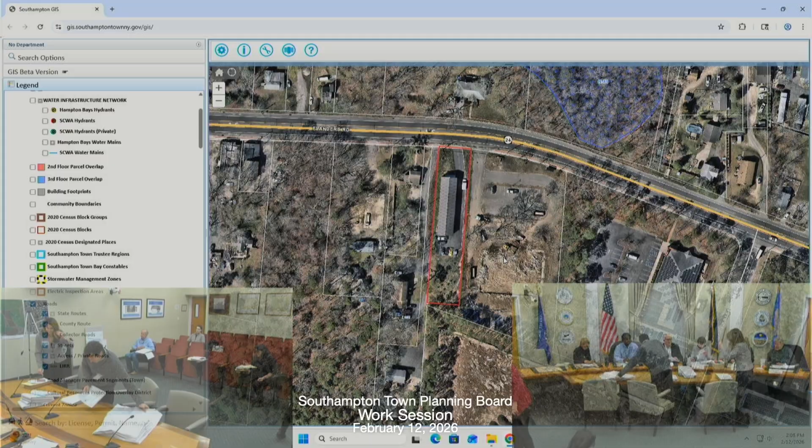Welcome, could you just identify yourself for the audio record? Haley Lyons from Farrell Building Companies. Welcome. So yeah, this is at 265 Flanders Road, in the light industrial LI 40 district.

Furthermore, it is also listed in the Aquifer Protection Overlay District, the Central Pine Barrens Compatible Growth Area, and the Riverside Overlay District.

Seth, can you just orient us exactly where it is in Flanders, what's close by? Sure, well so if you're aware of the STP, the sewage treatment plant, and the enterprise zone, that's to the south.

I can do this. Thanks. So this was the Head Start building. It's been demolished, and then, of course, that's the bank on the corner, but the STP is south of that, down south of it. Okay, perfect, thank you.

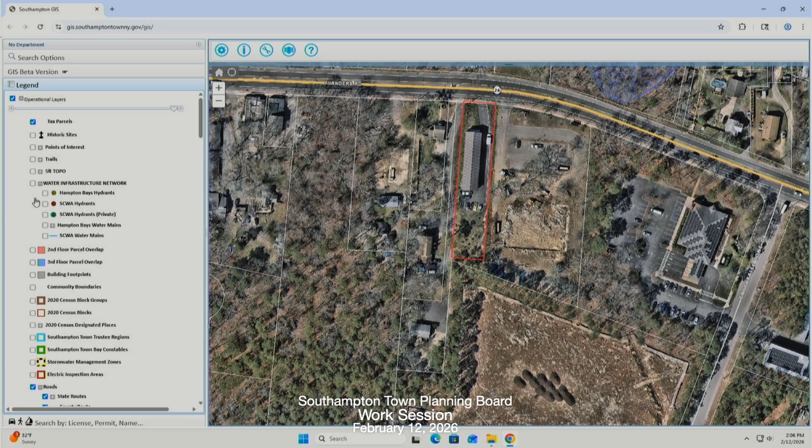Head Start next door, residential to the west, town, and otherwise it's town-owned land. And then to the north you have county - I think one of those is county and one is a residence.

At any rate, this is a fairly straightforward application. The site does have a site plan for True Arts Ironworks, correct. This will be a change of use from a special trade contractor to an auto body repair garage, and there are minimal modifications in this application to the pre-existing building.

Okay, you good on the parking there and everything? That is one of the reasons this is before us. In fact, the crux of the matter was - it had 3 overhead bay doors, 12 by 12 garage doors. According to the code, for every bay door you have to have 4 parking spots.

So when it came back in, we noticed there's not required parking for that amount of overhead doors. What the applicant is proposing is to remove the overhead garage doors, keep the 5 existing parking spots with 1 overhead bay - that would be the 4 for the bay and the 1 for the employee.

Now, do they get credit for interior parking though, don't they, if they're showing that? That's a great question, I don't have... The bays are what's generating the parking. So if you have a bay, it generates 4 more parking spaces because of the use.

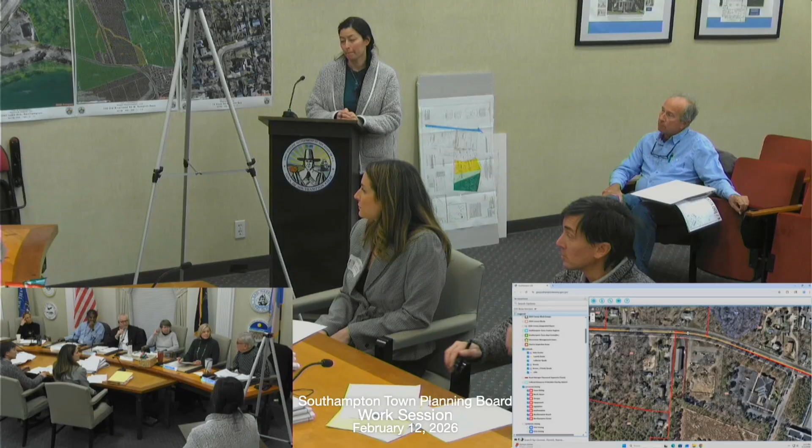One of the challenges we'll face in the future, not now, maybe 2028 or 2029, if the plant comes online in 2030, is what about new projects switching to IA systems just a year before connecting to the sewage plant? It's a problem for the future, not for now, but interesting.

We've had discussions about this. Kathleen Murray, another town attorney, and Janice and I had a discussion about it yesterday. Janice had met with the Health Department, John Schellingen, and my understanding was specifically with respect to residential - I don't know about commercial yet - under the town code presently, if you do an expansion of 25% or more, you're required to hook up to an IA septic system. Under the health department, if you meet certain criteria, you're supposed to upgrade to a septic system. There is a provision in the health department code that says if you are in an approved sewer district that is on the commissioner's list, you're not required to install an IA because you're getting a sewage treatment plant.

Because it's unfair to make somebody put in a brand-new system for $30,000 and then just have to yank it all out. So in that particular instance, for residential homes, if they wanted to do renovations that would in theory trigger an IA septic system upgrade, they would say okay, you're getting a sewer district in 2 years, you don't have to put one in, but you have to know you're going to be connected. Right, good to know. So don't put in an IA system. No, we'll try not to.

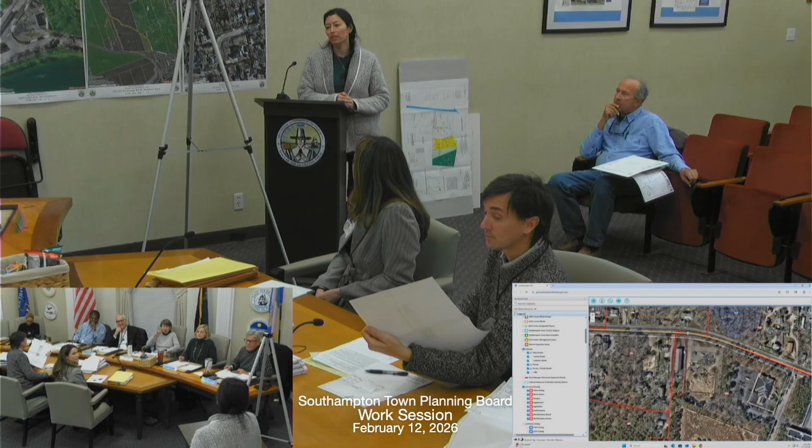Wouldn't we want that modified to allow for trenching into the sewer? I'm thinking of large trees. It depends on where the existing septic system is - we don't know that yet. Because this lot has an existing septic system, and depending on where it comes out, you may not want to re-plumb the entirety of the building. If it comes out on the side, they would just connect that side to the grinder pump and run it underneath.

The disturbance for this is really going to be minimal because it's just the trench for the pipe, which is probably only going to be this wide. And the grinder pump - they brought one in for one of the recent work sessions - it's in the driveway, you drive it up, so I think you're all fine.

They have technology now where they can do directional drilling of pipes - directional boring. I mean, obviously the size of the grinder pump is dependent on the use, but they're really not big, like this big.

All right, do you have any more questions for me? Do we know - Teresa, thank you as always. Yeah, thank you, really got an education. What's happening to the Head Start site?

It's not our jurisdiction, so we really don't know. I could ask. The reason I asked is I was wondering - this isn't County Road 39, but it is a busy road - do we need to provide for any kind of cross-access easement between the two properties? I guess we could, but it's just not apples and oranges, right?

I'm just asking because I don't know, especially since this is going to be a pretty low-key use. It would be ideal, but it's also a place that, if it continues to be Head Start, has buses coming in and out. It's really a low-intensity use on our site in particular, the one in question. I can't speak to what comes next for that Head Start.

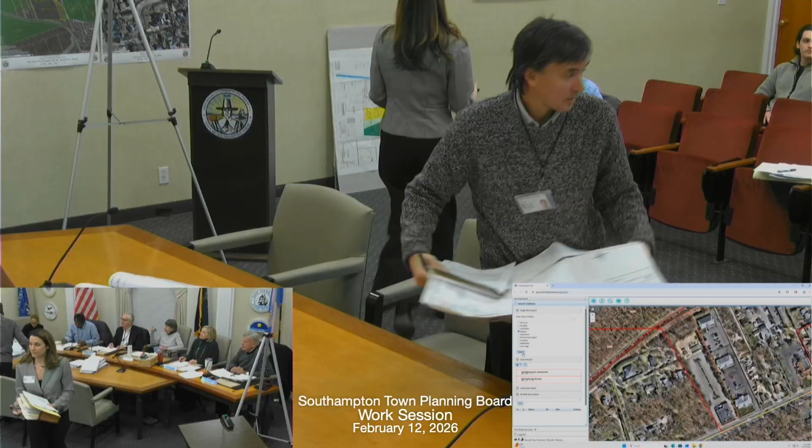Anthony, tell us the status on Pietro. I think Kevin was just going to advise the board where he is. Hi Kevin, how are you? Come on up, just identify for the voice record. Kevin Springer, Dynamic Legal, 48 Columbine Avenue North, Hampton Bays, New York.

We've had a couple extensions here, as we're all aware, but I have finally gotten a hold of the lone complainant, who is the neighbor to the west, and I gave them a quick update. We are going to meet next week to walk the property again, show them what's been proposed, see what they think, and try to come up with an amicable solution for everybody so we don't have to keep dragging this thing out.

This way we can have it all on paper and there's no more confusion and call it a day with it. So we'll get a revised site plan once you know. I'll eventually need the revised plan because I have to move the outside bar anyway, that's just by code.

So it's definitely gonna happen. We're thinking of an extension, Anthony, do you know what is it, 30 day or? No, we'll just do to the 26th. I'm gonna meet them in 2 weeks, literally 26th, probably Monday or Tuesday of this coming week. So, is the idea, do we have a motion to extend to the 26th? Motion by Kate, second by David, all in favor? Aye. Opposed, abstentions, 5 yes, 1 absent, 1 vacant.

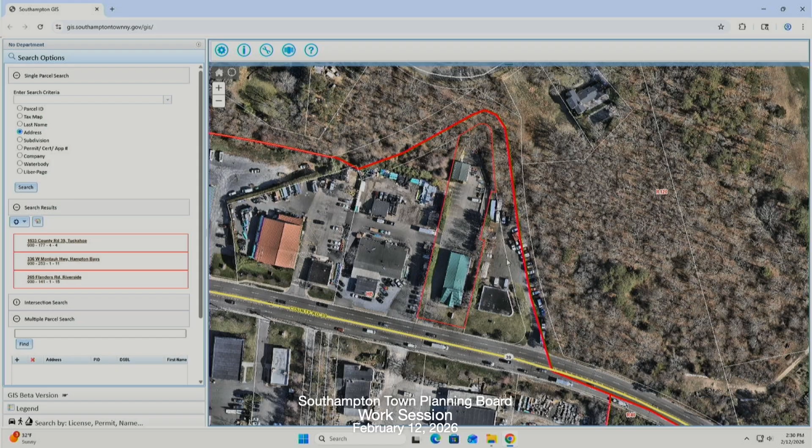And so, what is Brown Buddha? So there's been a complete site plan done on this property since this bond was effected, and it was never released. So this would be releasing the money back to the person who did a bond on this property back in 2012, way back in the day. I'll write a resolution to the fact that we had a bond set, the applicant never requested the bond to be released, but there's been a complete site plan that's been completed with the CO, and therefore the monies is not relevant anymore, it can go back to the applicant.

I was just gonna ask if the applicants don't chase the money back once they finish. You know, it's funny, but that would be probably one of those things with New York State, you look that up, if there's money someplace for you. It should be distributed among the underpaid planning board. It's $2, after the mic's off I'll tell you what I think.

Do we have a motion by Gloria and second by Kate, all in favor? Aye, opposed, abstentions, 5 yes, 1 absent, 1 vacancy. How about B and B Properties, this number is the 5?

Same situation. This is Starbucks. It was approved back in 2000, Bridgehampton. And this was 2 bonds that you had set, one for $1,000 that was to upgrade the lighting, and the other one was $2,000 to upgrade the landscaping plan. And again, there was a site plan done in 2010.

For some office building on the property, and we completed that, CO issued, no bond with that. So this would be just to return the monies.

Is it one resolution to release the two bonds? Two bonds, very good. Motion? Kate, but on the motion, Gloria on the second. All in favor? Aye, opposed, abstentions, five yes, one absent, one vacancy.

Dakota, is that you? Dakota Properties, yeah. Yes. And then this is off the agenda, I have to check item double 6, is that one? Great, alright Claire, don't go too far.

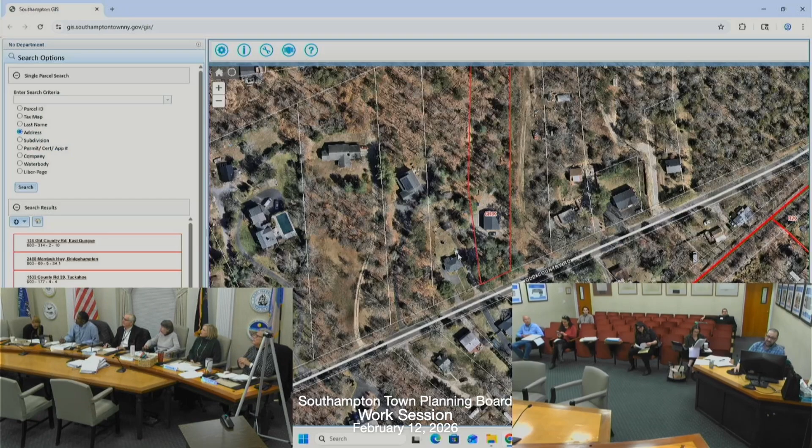If you look at the aerial up here, it involves two properties on Old Country Road in East Quogue. It's a CR80 zoning district, these two existing properties. It's got an existing house with a garage, and the application was processed as a subdivision, but it's sort of a reconfiguration of the lots, so there would be one lot in the front and one lot in the back. It's like a flag type situation.

Well, actually, if you look at the aerial, it's hard to see up there, but to the north on this property, the very north end, a portion of the corner of the property fronts on William Street or something—it's a private road. They don't have rights of access to it.

But this was a project that went before the zoning board for some lot area. At the time, it was a determination that was made that they had legal frontage on a road, so they didn't need a variance, but they're actually providing an access easement from Old Country Road to provide access to the back lot.

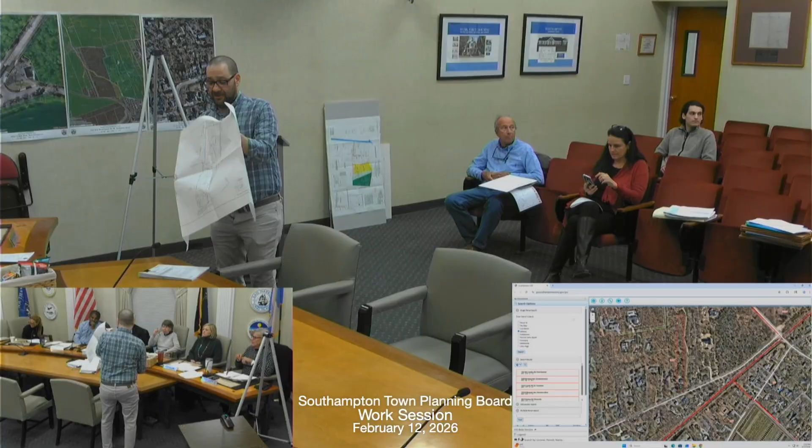Sort of see, it's pretty straightforward. The front lot there has all of the existing improvements, and then the lot in the back is vacant. Where's the access for the back lot? It's hard to see in the plan. Where is it taking access from the back lot? Right here, to the side.

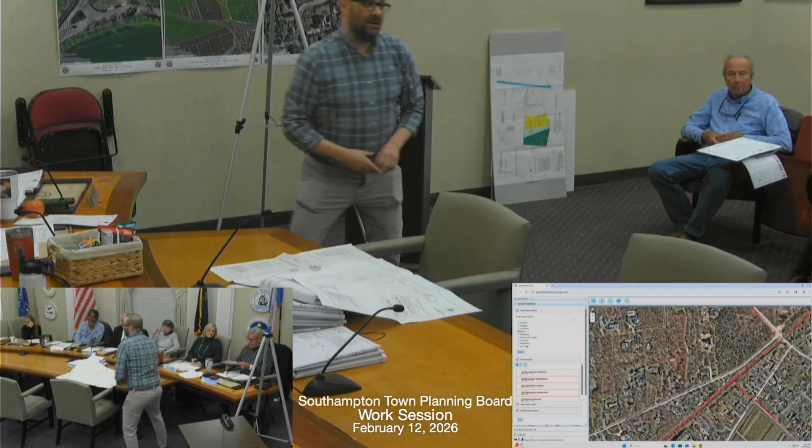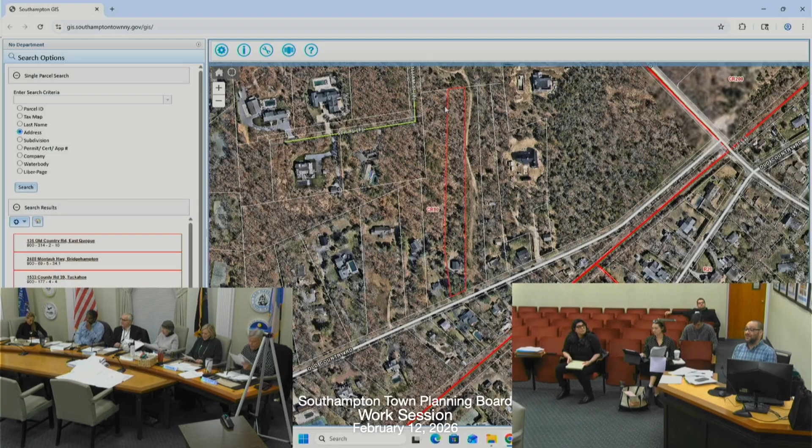Now I'm just gonna give out a little pile of papers for everybody. When this was done, this had a planning board application, a ZBA application, because it needed a little bit of relief. This is in the Aquifer Protection Overlay District, and what happened was it got classified as a type 2 action, and it got processed that way.

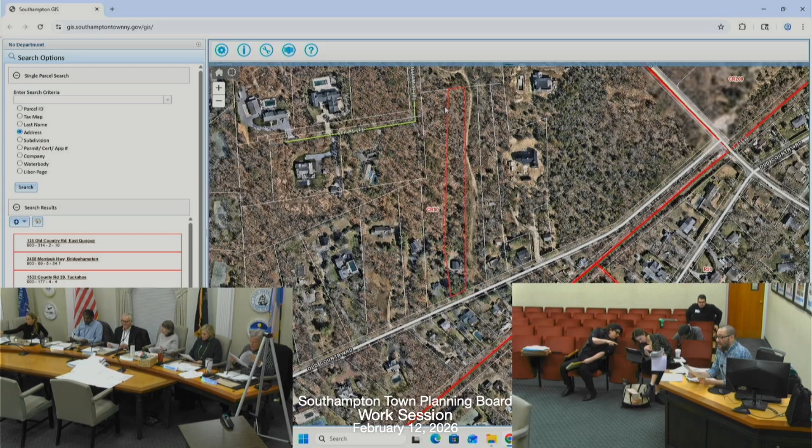A colleague of mine from another municipality who lives nearby pointed this out, and he's correct—it should have been classified as an unlisted action. So what you're going to see in the very first two papers I gave you is just a short EAF form, and then a resolution rectifying the record here. It's a two-lot subdivision with clearing restrictions. It's only one new house, so there weren't any significant impacts, and that's why we did a short form.

But if you look at the resolution, at the very bottom of the first resolution, it says: be it resolved, the Southampton Town Planning Board hereby rescinds the previous type 2 classification and reclassifies the action as unlisted to ensure an accurate record and proper procedural compliance with 6 NYCRR Part 617. Then it goes on to further resolve that the planning board conducts an uncoordinated review of the unlisted action and establishes itself as lead agency, and has reviewed the short EAF form and recommends a negative declaration.

I wanted to get it in the record so that it's clear that we acknowledge that there should have been some SEQRA review here. So my first action really was to reclassify, be lead agency, and issue a negative declaration. So that's the first resolution.

Do we have a motion? Motion by Gloria, second by Kate. All in favor? Aye, opposed, abstentions, five yes, one absent, one vacancy.

And then if you go to the second resolution, it's actually a conditional approval. So I'll go through it there. Sure.

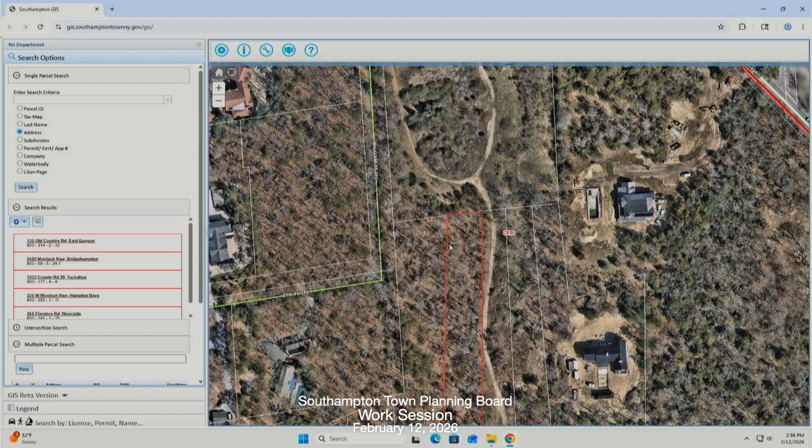What I'm recommending, because we have clearing restrictions that we're going to impose per APOD, is from the north side of the improvements on this property, a 20-foot buffer all the way up to the top. There's been some pine beetle damage here, and there's some nice white pines already in this area. They're not usually used in native plantings, but they do exist and do a little better. After talking to Teresa about the pine beetle situation, and the neighbor confirmed they were out there, I'm recommending they augment that buffer with some white pines to maintain a buffer corridor and protect neighbors.

And then we're going to have the clearing restrictions on top of that.

Number 3, the zoning board granted relief for this on November 1st, not 2028 — that hasn't happened yet. Time flies.

Health Department approved this in August 2025. Number 5, we had a public hearing on December 11th followed by a 30-day written comment period, and we did get comments. We received a letter from the adjacent property owner, Brian Frank, dated January 9th, raising a number of issues and objecting to the subdivision: clearing calculation discrepancies and inaccuracies, existing non-conformities to current zoning, and the subdivision would only create additional non-conformities, diminished ecological benefits, the pine beetle infestation, incorrect septic classification, and storage and maintenance of trucks on site. There had been some indication from two neighbors that trucks were being stored on site, but on the two occasions I went out there, they weren't there, so I noted that in my resolution.

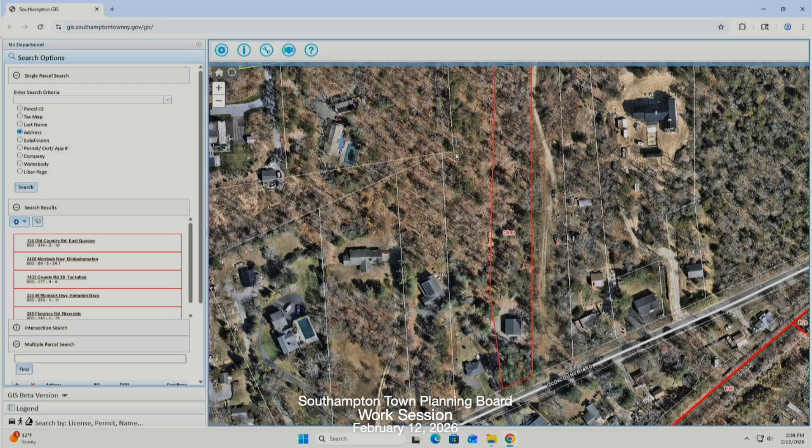On both lots, right? If it's on the western property boundary, or just — yeah, well, where we had the issue, you can see here... I was recommending augmenting it here, because this is where you get a lot of the beetle infestation. As you come up here, it gets better.

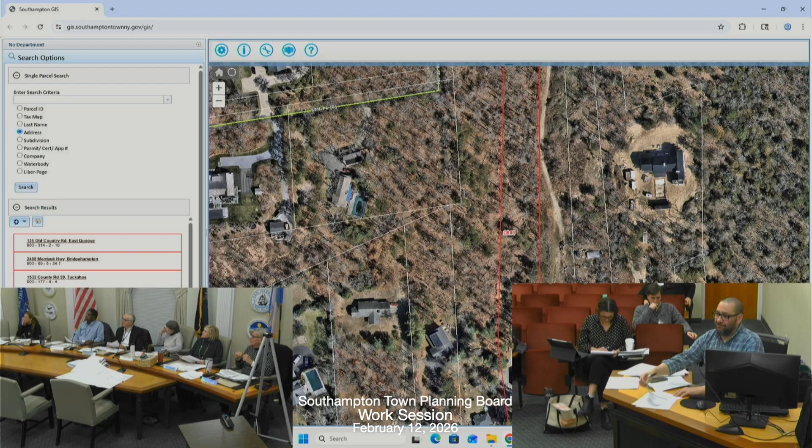Can we tie it so that it wouldn't be on the vacant lot? It wouldn't be on the vacant lot, so I can't tie it to a CO, and you can't tie it to a building permit. So I didn't know, we just wanted to give a date — you don't want to take a bond on private property.

Can we tie it to signature of the map? Or are they looking to get it signed pretty fast? It's February — they probably could get it signed pretty fast. Their representative said, come on up.

Anthony, while the applicant's coming up — I'm seeing the red lines around what I think is the property, but you're pointing to... It involves two properties next to each other, so it's this one and this one, and on that map, combined, one lot will be down here and the other lot back here. Could you identify yourself? Brian Locascio with the Adam Miller Group, attorney for the applicant.

Perhaps I could put together a simple plan showing where these trees are to be sprinkled in, and we can tie that into the declaration we file, requiring the applicants to maintain the buffer materially consistent with this plan, dated and prepared by us. That way there's a plan on file, and if it's cleared, we can just re-implement that plan. I'm okay with that. Yeah, that works.

Just get together, we'll write that into the resolution. I'll put into the plan where we feel like these trees are needed. You should prepare a plan, then we can approve the plan, and Anthony can take a look at it. All right, great.

Number 9 is an updated clearing line and clearing calculations. Take into account they'll show the pine beetle areas of infestation. We don't typically penalize somebody for that because it's not their fault, but at least we could see where it is in relation to the building envelopes and the buffers, and if it needs to be supplemented, we could do that. But it's best for Marty's office to just leave it alone and let it revegetate. That's so true - anytime we pull a permit, we're going to have to comply with clearing, so we need to look at it every time.

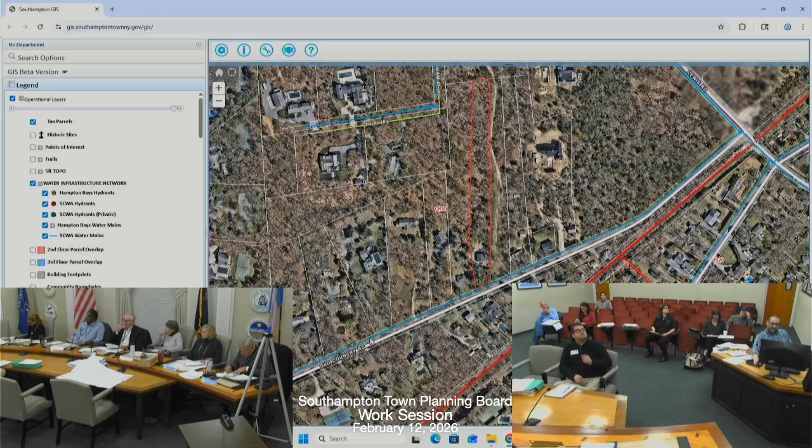The next one is from the Town Office of Fire Prevention. Weirdly, they're recommending fire hydrants somewhere up here. The thing is, we have public water in the street, and a hydrant over here and a hydrant over here, and we didn't get a recommendation from the fire district on a hydrant. So I'm inclined to just leave it out.

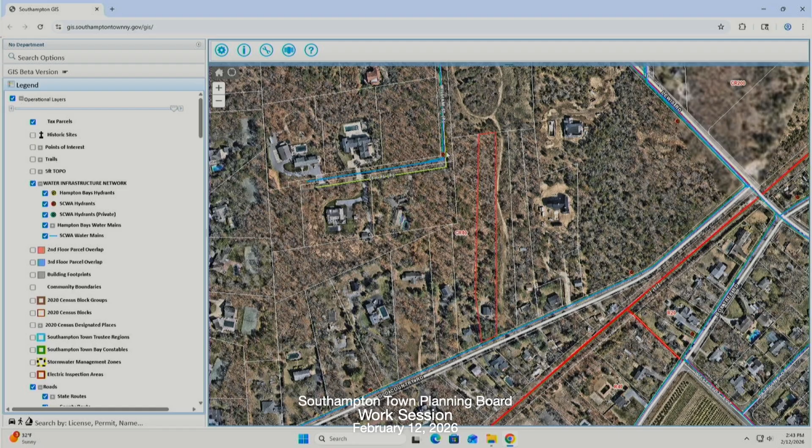Have they responded? Is there water on William Street as well? I see a blue line up there. Yes. Is there a hydrant up there? There's a hydrant right here too, I just never noticed that. Where, on William? Yeah, right here. So there you go. So, the reason is you have public access water, no recommendation from the fire district itself, so I'm just thinking we don't need it. Yeah, it usually comes from the fire district. That be more of a reason to remove the buffer from in front of the lanes altogether, or no?

It could account for emergency access, but I don't want to overcomplicate it. If a brush truck knocks over trees, there's bigger issues at that point. Let's just leave it with the ability to put a driveway in there. That's typical, boilerplate language.

Trails - no advisory, no recommendations. East Quogue Fire District - no recommendations. The Pine Barrens did come back with their review.

Pretty standard, if you go to the bottom of the page and the next page where they get into the requirements, they talked about natural protection of vegetation through a covenant. We will put a covenant in there that will reference the APOD like we normally do. I don't think that's an issue.

They said placing an identifying marker on the edge of the area to remain natural. We do project limiting fences during construction, so I think that's covered, to be quite honest. I drafted a sample covenant a year or two ago that everyone seemed to like about project limiting fence and keeping it up for the duration.

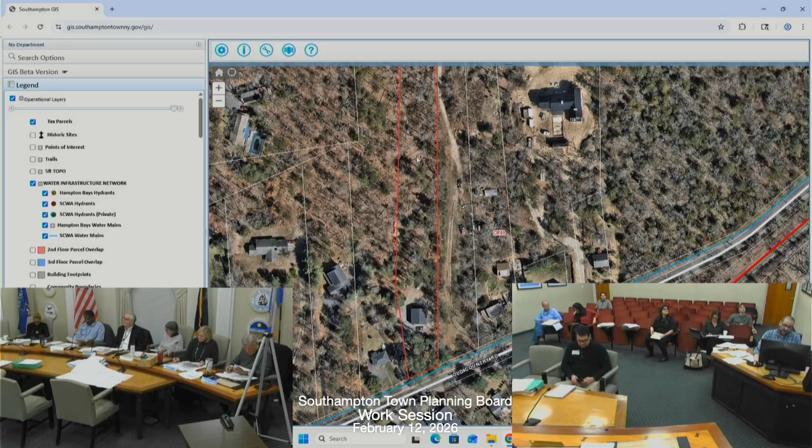And it's shown in the map over here going to the back. And again, we won't close the door for access here.

They have the rights. They could take it.

The Aquifer Protection Overlay District clearing limitations for each lot - no new utility poles for overhead utilities, all new utilities shall be installed underground. There's the 3-inch drainage requirement for the engineer, and retention of all stormwater on site before, during, and after construction. Mortgage consent if applicable, title certification, town attorney approval of all legal documents, and submission of the Mylars and paper prints to be signed and filed within 62 days of the signature.

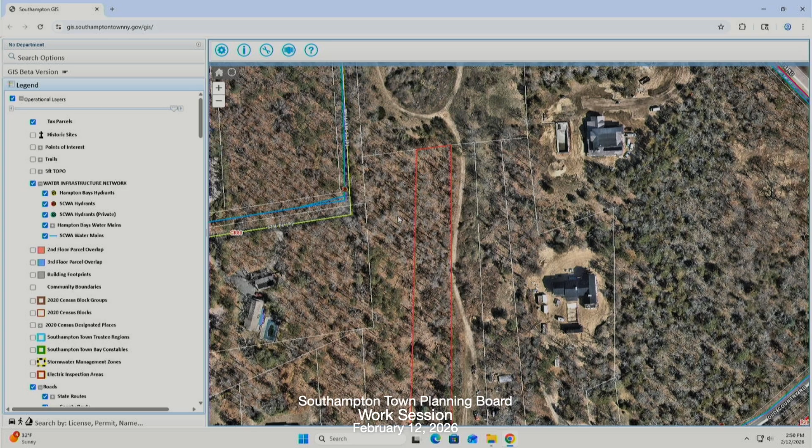Very good. Any issues, Brian? Okay, do we have a motion? Motion by Gloria, second by Kate. All in favor, aye. Opposed, abstentions? 5 yes, 1 absent, 1 vacancy. Thank you very much, good job. Thanks, Anthony.

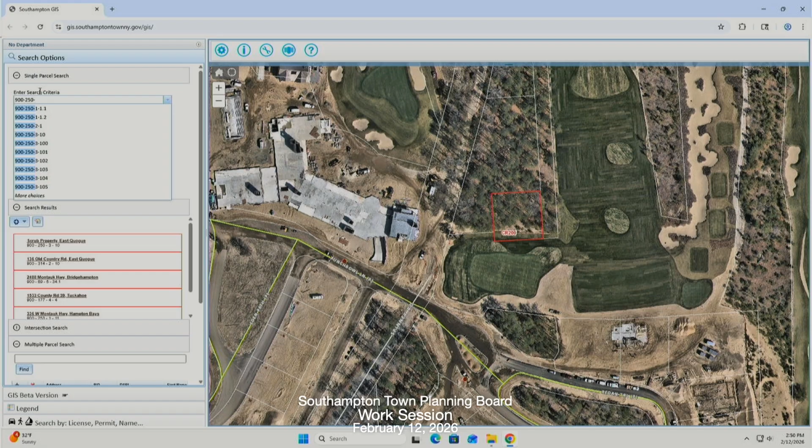Come on up, come on up, Joe. I wasn't here the last time this was on; the last time I saw it was back in November, 4 lots, and in December now we're down to 3. George, you weren't here either, right? Both of you weren't here at the last meeting? No. Yeah, okay. I wasn't here at the last one. We'll have to reacquaint us, Joe.

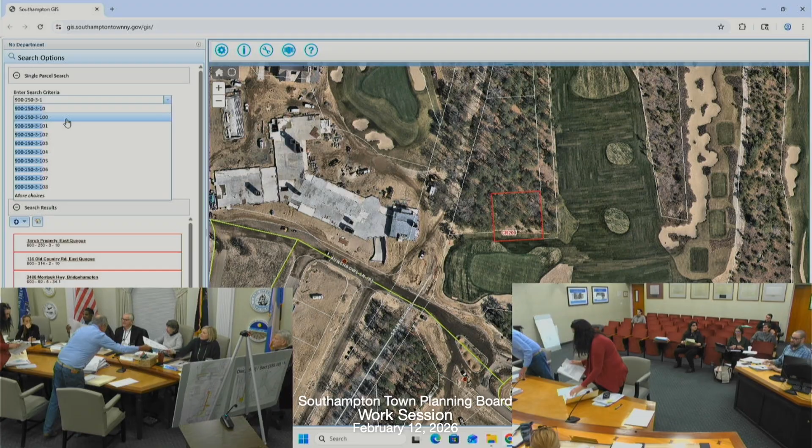For the record, it's Joe Gaza, and I'm before you today because I have an application. I've been before you for about 5 years on this. And, can I cut ahead, Claire? No, you can go. So we left this with an extension of the deadline until the next meeting, February 26th. But Joe called me up and said, can I be on the agenda? And so I said yes. So he's got something additional to bring to the new meeting - information I'd like to bring to the attention of the board.

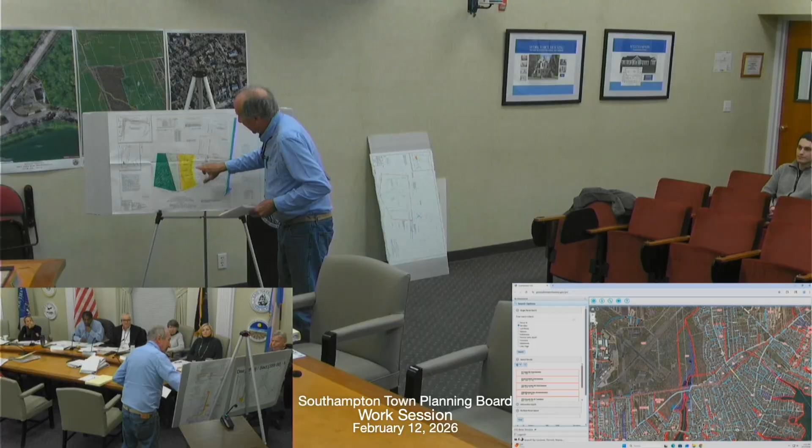Okay, great, we're all ears. I'm sure the board remembers this application - Kathy, everyone's up to speed on this. Originally it was 5 lots, that became 4 lots, now it's down to 3 lots. The 3 lots have conservation easements that are going to affect over 77% of the property. And the only issue remaining from the town code is that each lot has access over a right-of-way, a 30-foot right-of-way, rather than frontage on a public street, which has been before the zoning board since August 21st of last year.

And the zoning board has this coming up on their calendar next Thursday. It's sort of a time crunch because they said it's been on too long, postponed too many times, and they wanted to act on this application about the 40-foot street frontage. Now, having gone through all the agencies and departments, preserving 77% of the land and reducing it to 3 lots, I thought that was going to be the compromise. But I wanted to come today before you to offer something additional.

I thought that under the code, we have the 100-foot conservation easement, the 125-foot requirement for setback from the wetland line for the structures, and of course the 150 for the IA system. I thought if I increased the conservation easement a little bit more - I can't increase it very much more, otherwise there'll be no room for the houses - but maybe a small additional increase to hopefully get the board's approval so I can get over the SEQRA process and get to the zoning board of appeals next Thursday. Every foot counts, and I thought maybe 5 feet additional.

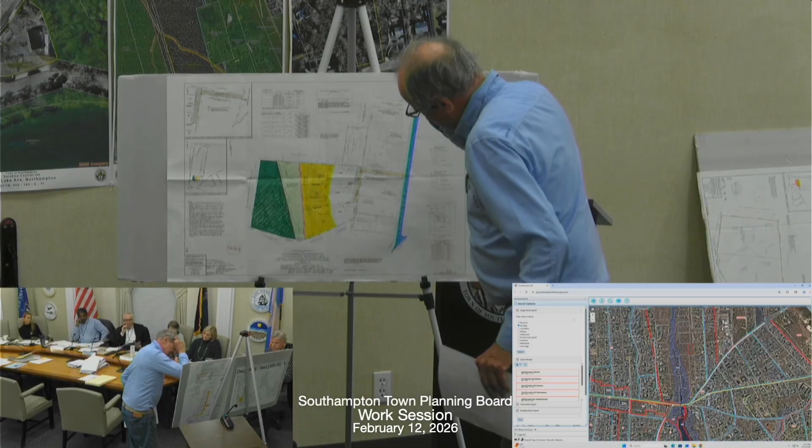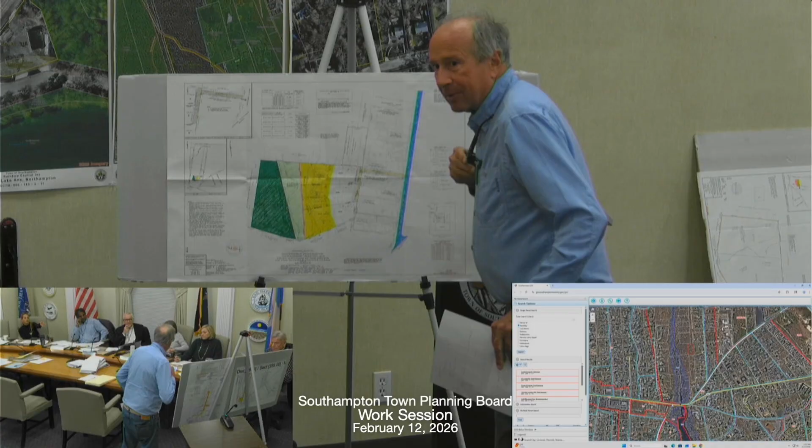Okay, just stick to the numbers, Joe. She wants to see numbers, that's going to help us see the big picture, the whole picture. What's left is this, which is 5.45 acres, 5.35, a little over 5 acres left.

And I have, earlier on in this application, already put a conservation easement on 1 acre and 3/4, which is the dark green, for 2 reasons. The first reason was to get the development credits off of the property, and the second reason was I thought it would satisfy all the neighbors on the subdivision off of Jeffries Lane.

So that's already gone, it's sterilized, the dark green, 1 acre and 3/4 sterilized. So now we're down to 4 acres, transfer of development rights, you got development rights on that.

Down to 4, I'm proposing to sterilize another acre, this light green, by conservation easement. But that conservation easement will go with the land, stay with the land, but not with the yellow. Just setbacks. Give it 1 acre and 3/4, now we have an acre additional, the light green, that's where the conservation easement is.

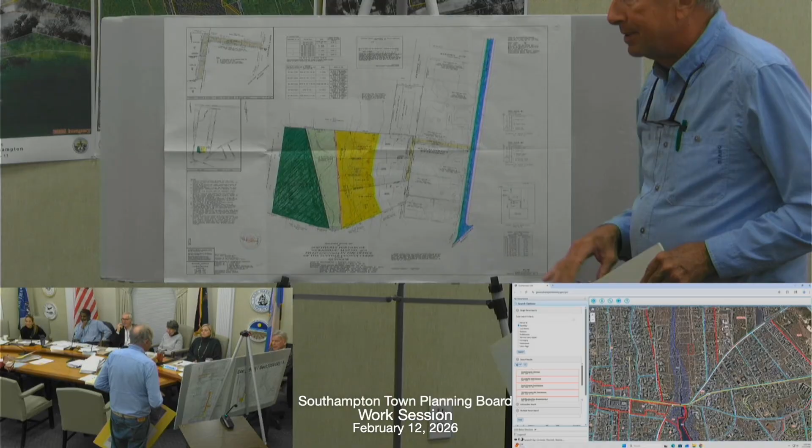Can you block his access to that lot using the easement? Very clearly for this, for that third lot. I cannot. You cannot, okay.

No, but that's not -- it would be conditional regardless of that issue, right? You could make an access, but we're gonna say this is a sending site. If you were to turn that back and make it a receiving site, you'd have to do a whole reopen of the SEQRA analysis.

You'd have to. I would recommend that because the access, one of the reasons I'd suggest this is that the 30-foot right-of-way is appropriate for 3 lots. If it was 40 feet wide, I'd say it was appropriate for 4 lots, and if it's 50 feet, it's a road.

Yeah, but does Mr. Nukowitz's document state this, that he has access over this easement as well? He does, yes. He owns the underlying land. He owns the easement land.

It may make sense that you would consider that, but that's not the question being asked. Now I'm asking about the 3 lots. Once he secures his variance, we get this back, right?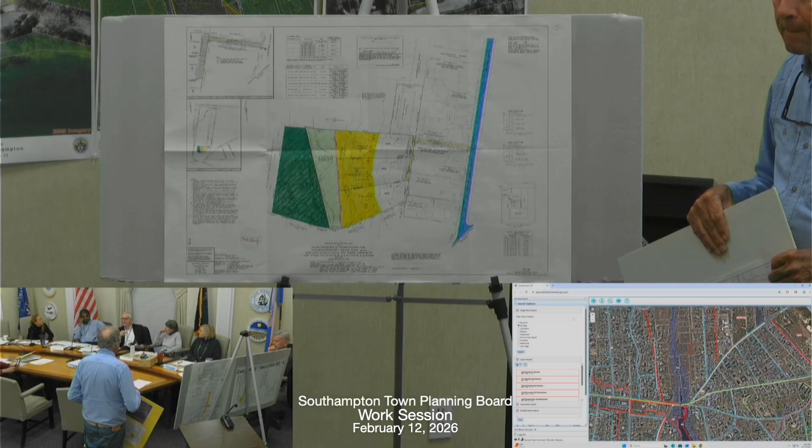So we can nail down these buffers. It's still an old file map. So we'll have the full site plan to nail down these buffers and the covenants. Well, it'd be a conservation easement, which is what he's saying, not a buffer, that's just a covenant.

Right, only on the access issue, before the zoning board. They've been adjourned till next week, actually, before the zoning board. The deadline is next Thursday. So when we go to reopen the old file maps, we can make that parcel a sending parcel only.

So that makes it so they have to come back to that. And then I'd really like to see these notifications taken off this map. The map you're gonna approve is not gonna look like that, not gonna look like a standard old file map yet. Yeah, and they're gonna take the building envelopes off too. He's gonna have the guidance to do that.

So would this be a conditional negative? I would recommend that - conditional negative declaration, with the conservation easement, the use of the easement only for 3 lots. That would be a condition. I have written something that would go any way you wanted to go. Those would be the 2 major conditions I'm thinking of right now.

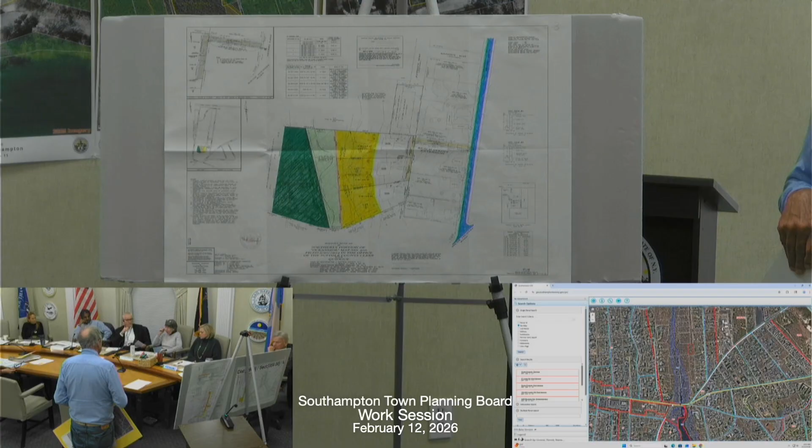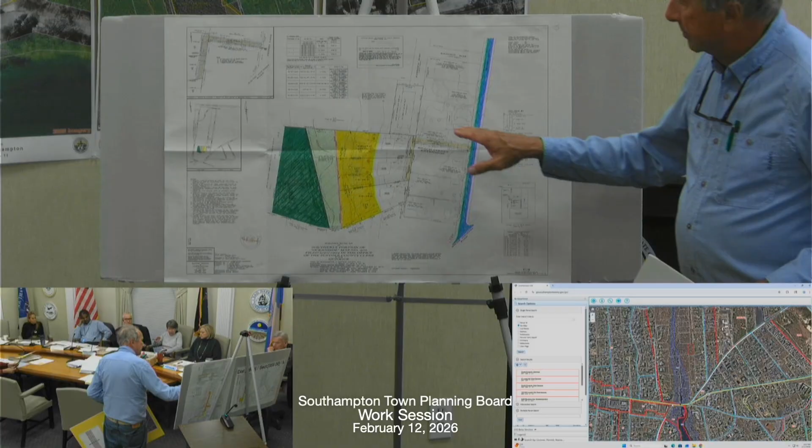I'm doing the numbers and I'm coming up with an answer that confuses me, using the numbers you gave me. We started out with 5.75, then we went down to 5.35 acres. Well, it's almost - we're 5.35 from here, all of this. Okay, an acre and 3/4 is already preserved. So at 1.75, you've already done a TDR.

Then another 1 acre, I think, you plan to do a TDR on the survey. I have it down to the square foot. On the lower left of your map, Joe, don't they bullet out some of these square footages? Well, who can see that? I can't - it's hard to see without my glasses.

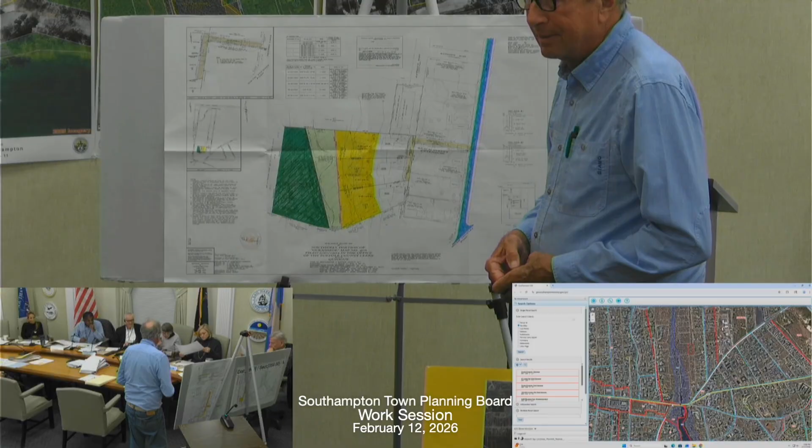It does say 77.45% preserved by conservation easement. I need my magnifying glass. Okay, I took the 5.35, subtracting the 2.75, and now I'm getting 2.6 acres, not 3. Yeah, but he's including the yellow portion as being under a conservation easement also - you can't build on it. The only part that's Gloria's point, the 2.65, is the white and the yellow.

You know what, let's do it precise, because the surveyor knows what he's doing. First off, when I talked in acres, it might have been a little off, because an acre is 43,560 square feet, not 40,000. So the area that has been preserved already is...

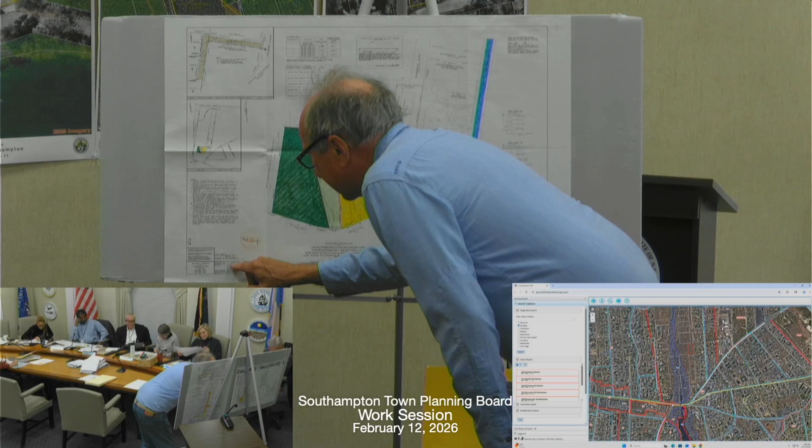73,398 square feet. It's listed right on the lower left. He bullets out all the parcels, it's hard to read. What I do sometimes is take a photo of it. Would the board like to look at this with my close-up? I'm still having a hard time even with new eyes.

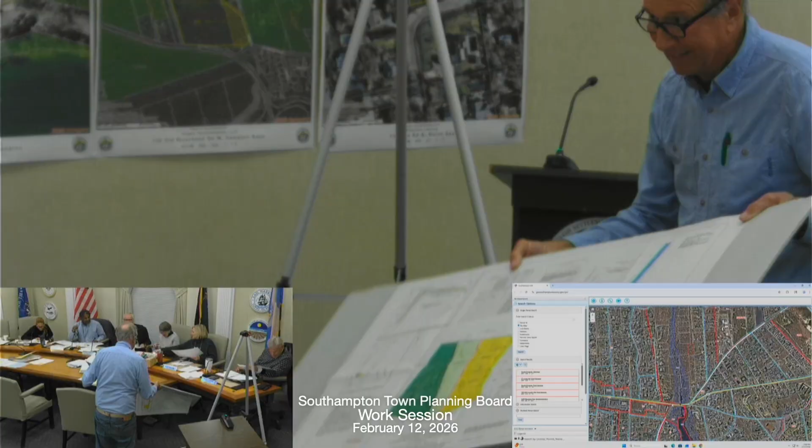I think you would include the yellow bit, the easement, the yellow portion, if you want. It's here too if you want this. I got it, Joe. What's the open question? How much is the white and yellow - that's what we want to know, right? And then how much is left, just white?

This dark green, easement B is a light green, and I can't see it. Total easement C, that's probably the yellow. I don't think it is the yellow, I think it's the little one, because it's only 57. What's that number?

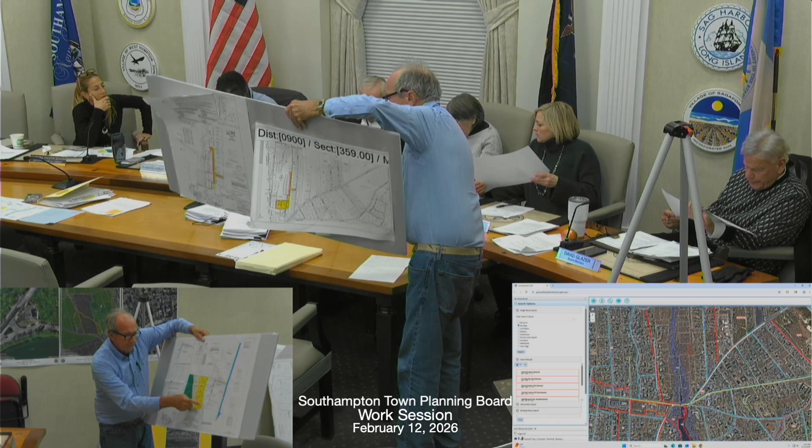67,370 - yeah, that's the yellow area, the total preserved area. Joe, what's C? I have to look at the map for this. It's yellow, we have the same thing, just in miniature. Let me review it - oh, I can read this, I was trying to. 40,000, no, it's on the lower left. A, B, C altogether, that C is 67,370. 180,000... 180,780 square feet.

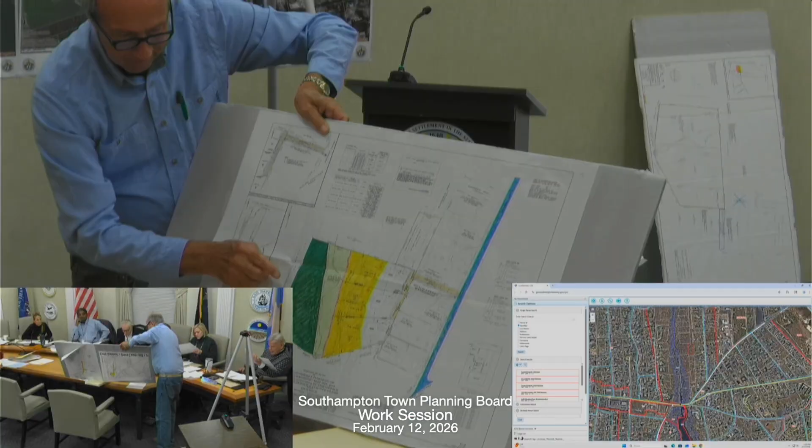4.78 acres. It says 77.45% of the property is forever protected by the conservation easement. And above that, proposed 3-lot development, average lot size 40,000 square feet. That's the lot size, but it's not how much is developable - the lot size includes the easement.

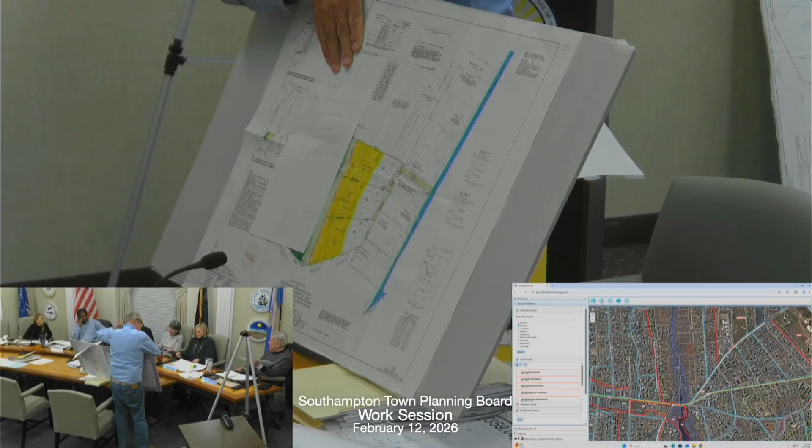The lot size includes the yellow, but they can't build there - you can reduce it, that's what I'm saying. Joe is proposing adding 5 feet, which would increase it a little bit - approximately 475, which is another almost 3,000 square feet.

This number doesn't include the 5 feet you're offering in addition - if we can get past that, I offer to move the line 5 feet east, increasing the size of the yellow. C will increase slightly, but the lot sizes stay the same since he's just talking about that portion. That portion meets zoning at 40,000.

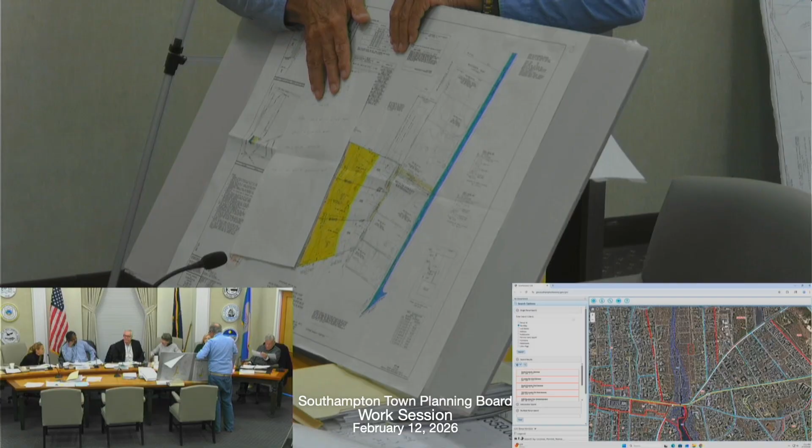2.6 acres for 3 lots. So it was not 1 acre per lot - that was because I was using the rounded numbers he gave us. Does that make sense now? Yeah, sorry, it wasn't precise. It's a little confusing.

I actually can read this, but I didn't know where to look. You can read it now? Yes, I actually can - that's the miracle of cataract surgery at our age.

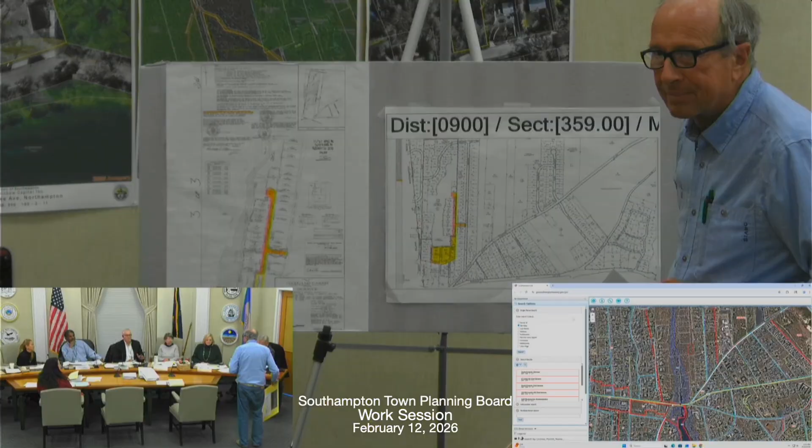That's great. Okay, so do people understand the numbers - the people that buy these lots, the white lots, they actually will own the white lot and the yellow, but they can't build on the yellow. That's correct, the conservation easement is over their backyard. And you're sure you can get houses with septic on this? Oh, they all can.

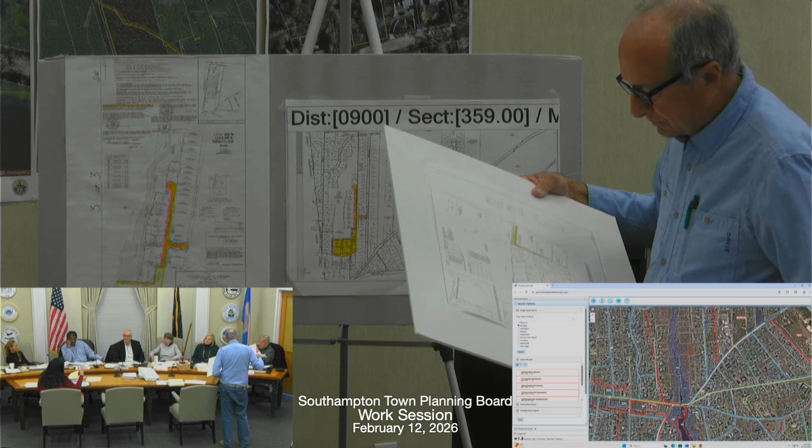I'm just going to clarify his building envelopes a little bit here. He's showing an 80-foot setback from, not the property line, but the driveway - so he gets that, right? So on 2 of the 3 lots, the setback is from the property line, not a driveway. There's no setback from the driveway because the driveway's on the lot.

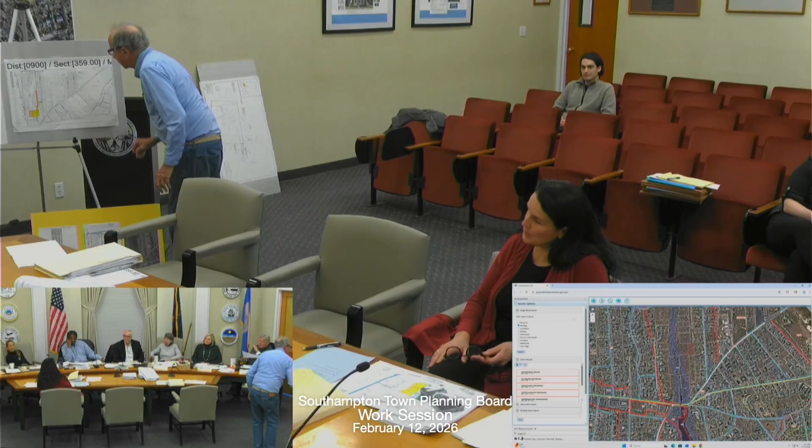Okay, gotcha. The second thing is the code allows you to reduce, when you have wetlands, by 50%, so you'll be entitled to 40-foot setbacks for that setback from a resident. So that's what the code reads right now - that they would not have to authorize anything about it, but there are bigger building envelopes than he's showing.

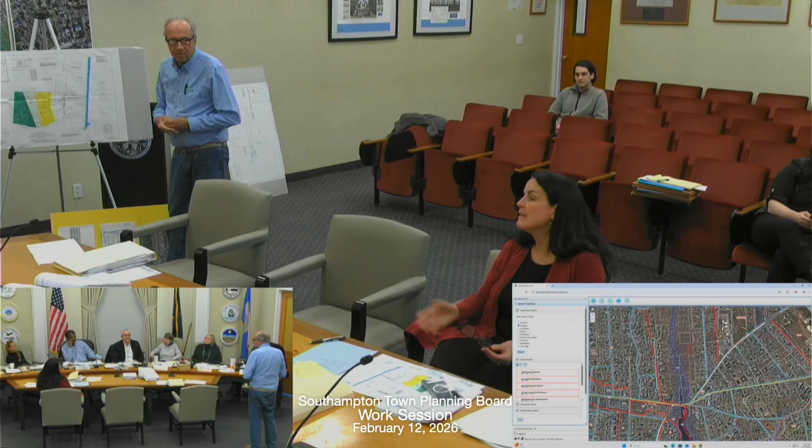Okay, and then we're just going to reflect that in the future resolution. So there are doable building envelopes.

So on the conditional neg dec, what are the conditions we're looking for? Well, let me pass it out to you so you're comfortable with this. I know one thing was the parcel behind - do we want any buffers from the parcels?

Since we know he's got such a big setback there, do we want a 20-foot buffer from the back, from the neighbors? Well, we have the driveway - we're looking at 20-foot would be kind of normal, a 20-foot buffer from the back lots. Yep, it just affects two lots.

What do you got there, Bubba? Oh, and I forgot to give myself one, but you can give one to Joe. You can have mine. Sure, yeah.

Yeah, and that's at 125 too. So your sanitary is gonna be maximum 125. I don't know if it's practical to put a buffer, because it's tight.

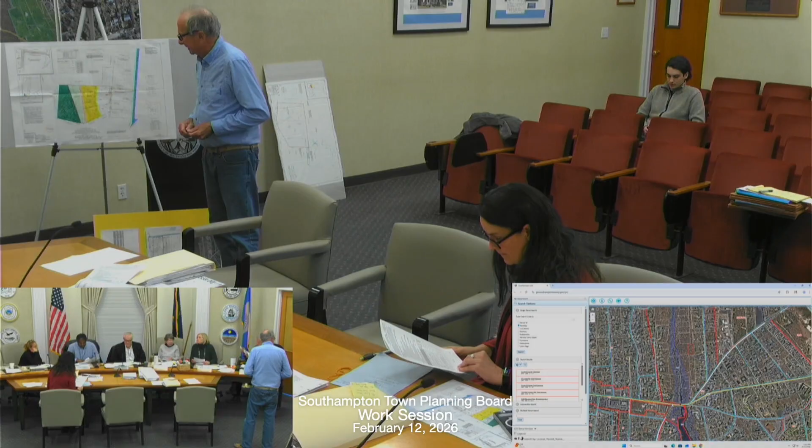Can you bring up the aerial? First, zoom in. The ones I've identified, so what I've done is identify moderate to large impacts. And then with that would be some conditions. I've identified 3 conditions that would be part of it. I didn't list the conditions at the end, but I've stated them a couple times. They would be impact on

the surface waters. This is the headwaters to Aspatuck Creek. That's why the town bought the property to the north, because it was very important that they preserve that. So with that is the 100-foot conservation, 105-foot conservation easement. So I say 100-foot natural buffer, but it'll be a 105-foot conservation easement, so I'll change that wording. And that's on top of page 2.

Impact on land is small to moderate, impact on surface water is moderate to large. Impact on groundwater is small to moderate. There's obviously a requirement of an IA system, so I'll say that there. I just put a little wording there. Impact on flooding, likewise, that was something the board had said before, located in a 500-year floodplain. And again, you're gonna do the 105-foot conservation easement on the property. So that's still condition number 1.

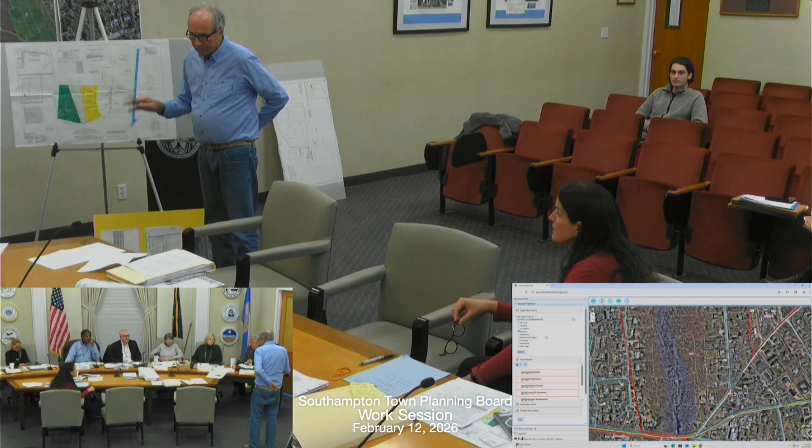I believe my surveyor went through all these calculations under the 4/10, 6/10 rule, and that's how he came up with the building envelope, using all the setbacks. Could you explain what we're talking about?

Sure, so the lots are basically 100 feet wide. For a CR-40 lot, which would be conforming, it would be 150 feet wide. If the lots are only 100 feet wide, they would not conform and would need some relief.

When you do an old filed map, they can avail themselves of the pre-existing setbacks, which is you take the width of the lot and multiply it by 4/10, and that is your total setback. Then you multiply it again, and that is your one side yard setback.

Got that? So it's a calculation. Reduce 4/10 of setbacks: 100 is 40 feet, so your total side yard setback would be 40 feet, and then when you multiply that again, it's 24 feet would be your minimum on the one side, or 16 feet would be the minimum on the other side.

I keep thinking of Wayne's World when Dana Carvey looks in the camera and goes, okay.

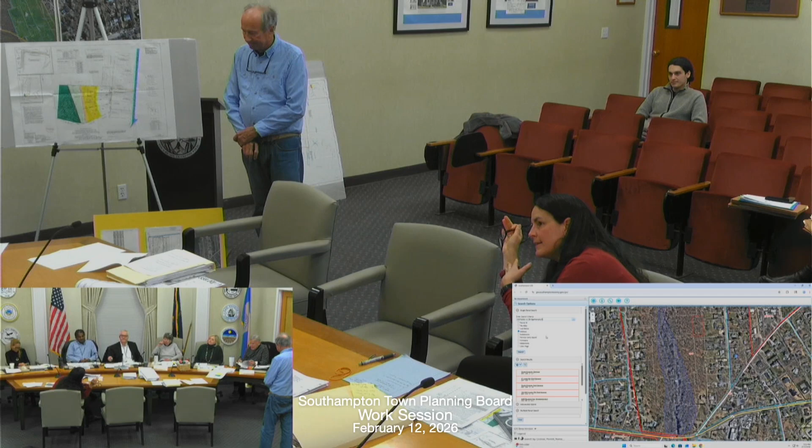It's relief for setbacks when the lot is undersized in terms of lot width. It's a tool so that we're not going to the zoning board of appeals every time you approve an old filed map that may be nonconforming. In this case, it's not conforming in terms of lot width, to get the lots away from the wetlands. That is the tool.

So on page 4, you've identified the conditions. Based upon the information provided, the 3 conditions would be: the 105-foot conservation easement, which includes the additional 5 feet; compliance with the northern long-eared bat restrictions and regulations; and number 3, the easement should only be used for the 3 lots.

So that would be a recommendation, it would be a conditioned neg dec, it'd be filed with the state, put in the ENB notice, and a copy would be given to the zoning board of appeals so they could use it with their application if they're inclined to grant it.

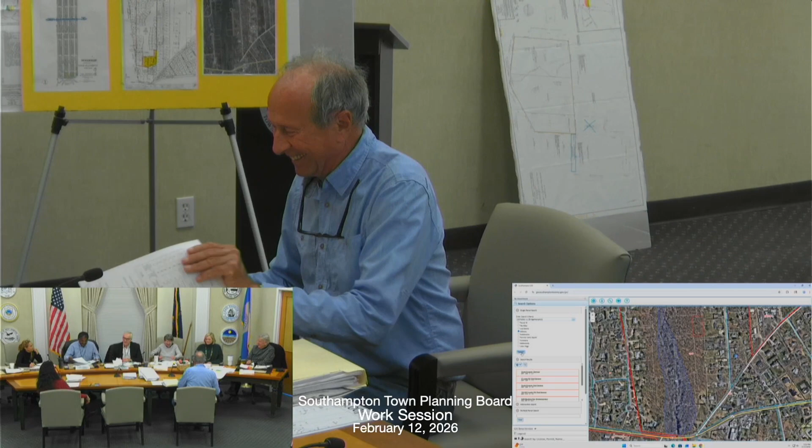So our action then is to adopt the conditional negative declaration with the conditions outlined by Claire. Do we have a motion? By George. Do we have a second? Second by David. All in favor? Aye. Opposed? Abstentions? We have 5 yes, 1 absent, and 1 vacancy.

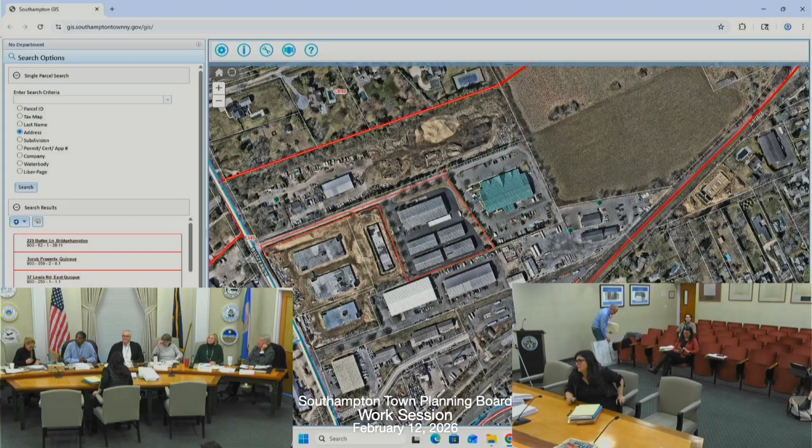This is an existing storage facility on Butter Lane, 223 Butter Lane in Bridgehampton. The board very recently saw this this past November, when it was on for pre-submission. What they're proposing is to convert the structure with the dark pavement to the left. You have the large structure in the front and 4 smaller structures in the back, and they're proposing to convert the large structure from warehouse storage to a 2-story self-storage facility.

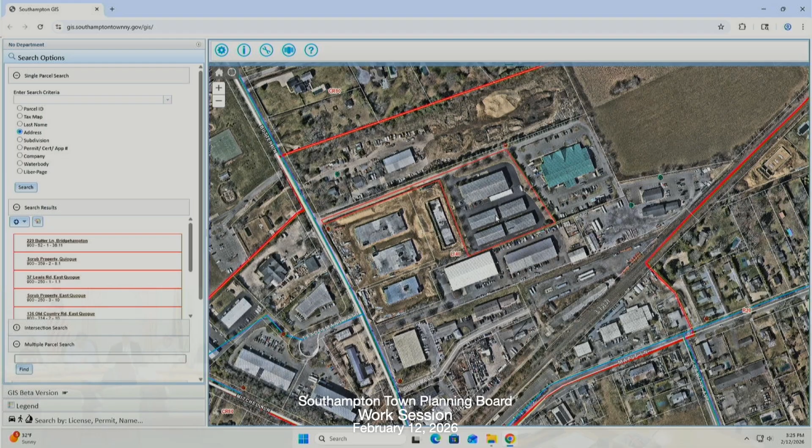So now it's back before you for final site plan, special exception review. It's a Type 1 action pursuant to SEQRA due to the associated quantity of parking, existing and proposed, and it's before you to coordinate SEQRA. I've identified the health department as an involved agency.

Coordination is mandatory, so our resolution is to initiate coordination. Do we have a motion? Motion by Kate, second by David, all in favor aye, opposed, abstentions. 5 yes.

Seth, are you ready to go? Yeah, item 10, Jacob Smither, 72 Bay Avenue West. This is Hampton Bays.

It's in the R20 zone. We have a subdivision pre-application that has been brought to the planning board. This is a 43,106 square foot property to be divided in almost half, 21,552 square feet each. At any rate, it is currently incomplete for lack of a septic system being put on the site plan.

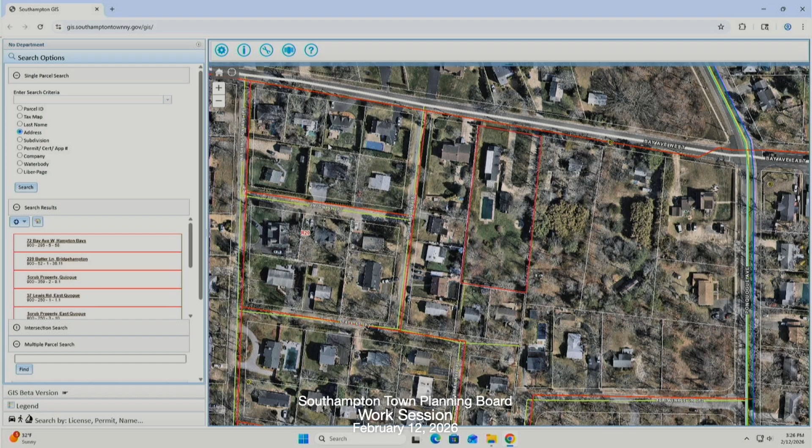So, motion to deem it incomplete. Is it a flag lot in the back or something? Yes, it is a flag lot scenario.

Seth, I didn't see a checklist. I actually have one here with me right now. I don't know if it was included in the packet. I thought it was, it should have been included. I find it helpful to see whether it's a whole lot of stuff or just a little.

No, there wasn't very much stuff, and I've heard back from the applicant—they're having difficulty finding the septic system. That could be a problem. It is a problem, but it can be found by hand. I've had to find my own before, so.

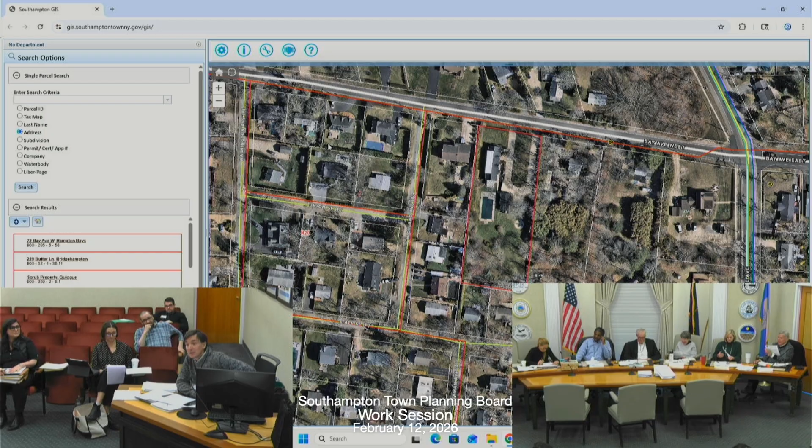So is it being deemed incomplete? It's incomplete, yeah. Very good. Is that a motion, George? Motion by George, second by Kate, all in favor aye, opposed, abstentions. 5 yes, 1 absent, 1 vacancy.

Thanks, Seth. And Anthony's up on Donato, completeness on the final application. So we have property here on Bay Avenue West, in the R20 zone. It's this piece right here in Hampton Bays.

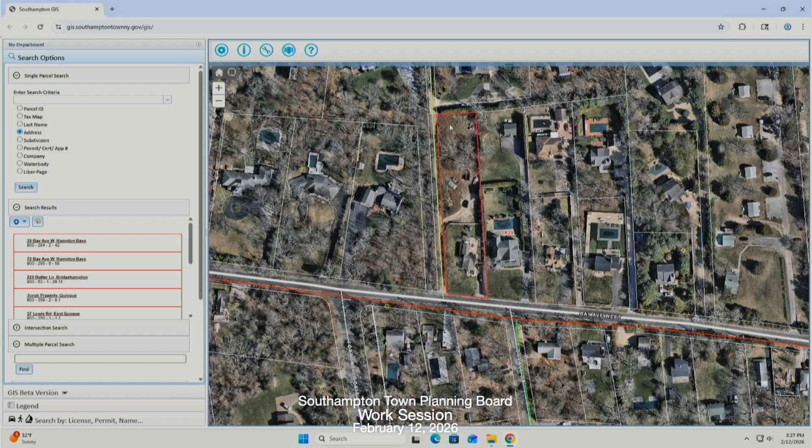You'll see next to it is this strip of land that's an access easement, attached to this property, accessing what's going to be a flag strip to the back of the property. This one also went to the zoning board, so it's been out there a long time. That strip is delineated here, a flag strip to the back, with an existing easement over it, and all of this is owned by the same family, as a matter of fact.

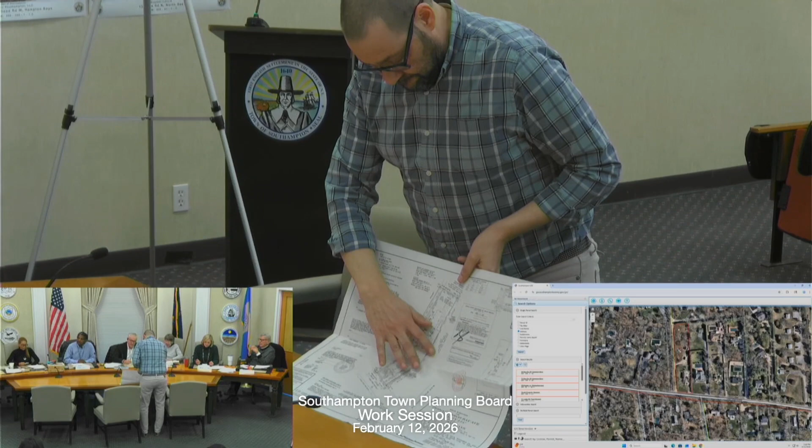How large is the front lot? The front lot is 15 and change. And they got a variance, it's R20 zone, right? There was a variance from the zoning board, and they also had to go to the board of review and health department, just so you know.

They can't get town credits unless they're doing affordable housing, right? The Pine Barrens credits were purchased and submitted to the county, and we received health department approval subsequent to that.

So they used that credit for the health department approval, and the variance for zoning purposes was granted by the zoning board of appeals. I did a resolution - we previously deemed this incomplete back in 2023 because they were getting through the health department. My resolution deems this complete, recommending we schedule the hearing for March 12th.

Going back through the record, there were no public comments when this was done initially, none at the zoning board stage. Then there's a public hearing at the health department board of review, where the county notifies the neighbors - no public comments there either. So I was thinking maybe waive the hearing with a 30-day written comment period. Sure, that makes sense. So that's what I'm recommending: complete, and waive the hearing with the 30-day written comment period.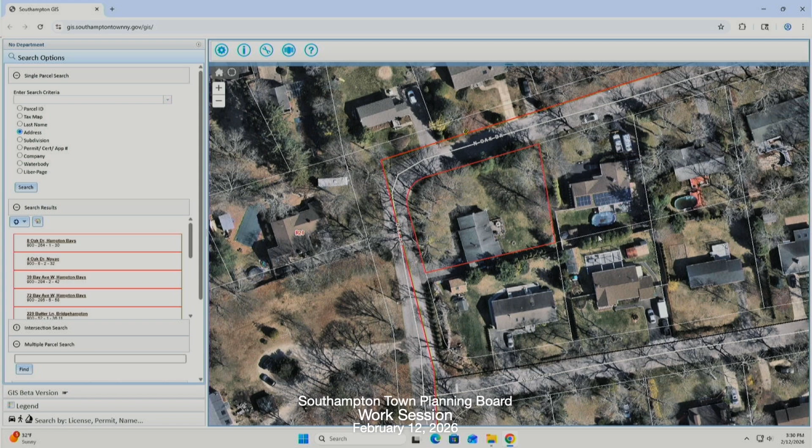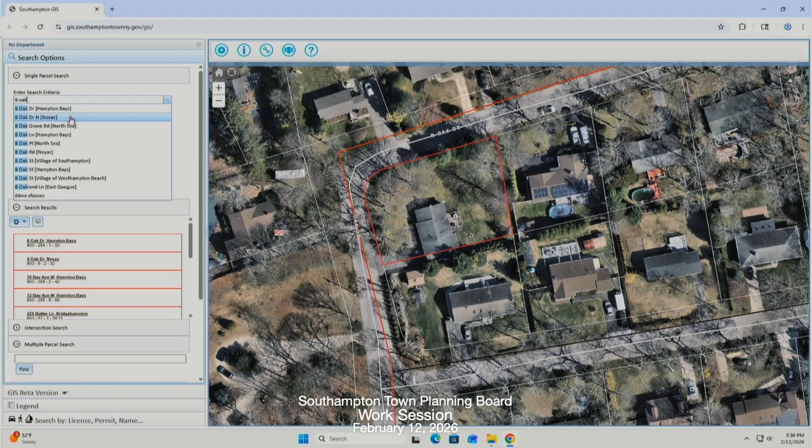Wrong one here. The next one, we have Charles Sarah. Excuse me, so this is actually just the right property here? Hold on. No, I don't have the right property.

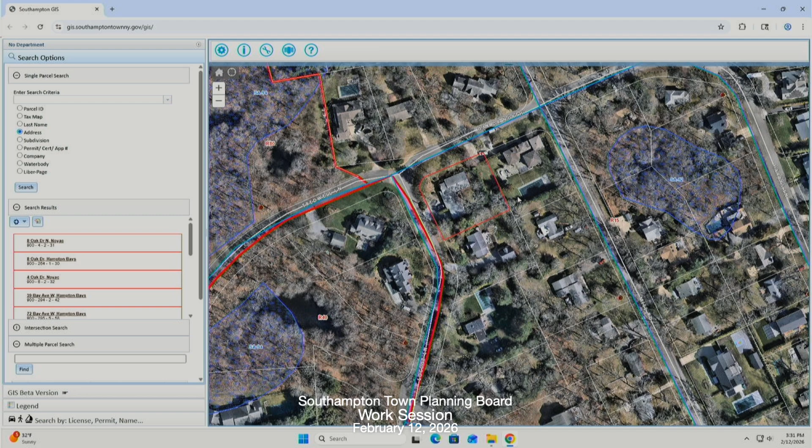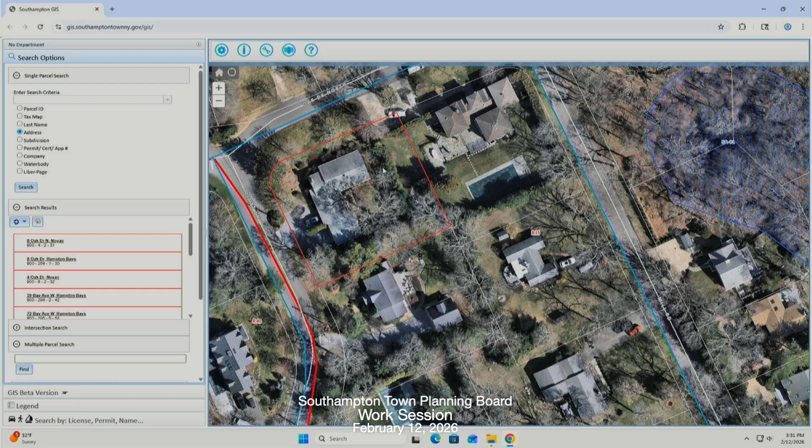All right, so this is in Noyac, residentially zoned properties. I believe these are in the R15 zoning district. And it was a lot line modification - Mr. Totaro owns this piece and this piece. There was a lot line modification, some of this land got shifted from the property. It conforms to zoning, both have houses on them already.

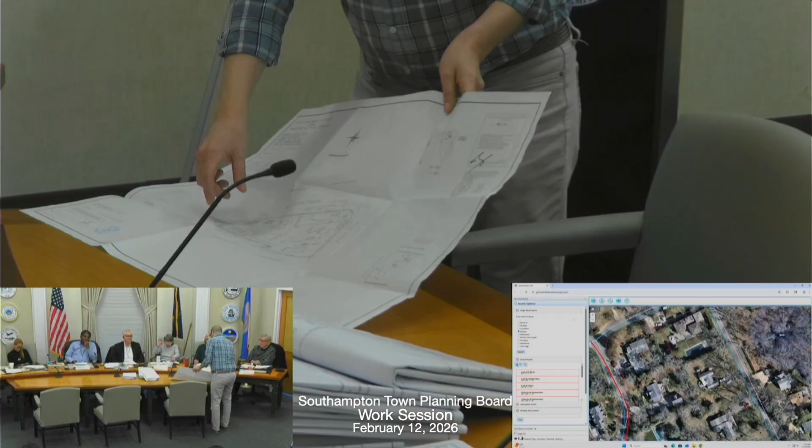I think it got deemed incomplete a while ago - there were some questions about potential zoning issues as a result of the lot line modification. That has since been rectified. I met with Candace in zoning - there's actually the setbacks and there's no pyramid issue. And actually, they already obtained health department approval. So I'm recommending deeming this application complete and waiving the hearing with the 30-day written comment period.

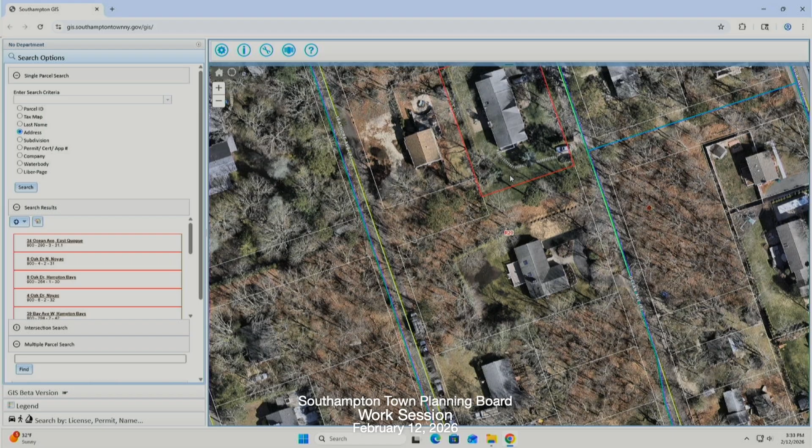Is that this portion here, Brenna? Yeah, the southernmost portion. A property owner, even with authorization from the other property owner, cannot abandon a full road. So they abandon half with the neighbor, and then they have to do a lot line change to get the other half. It's sort of crazy - it looks like they kind of acquired the other half of the road, they sort of started taking it over. Anyway, the survey that was submitted with the application was the survey used for the road abandonment.

So I'm recommending we deem it incomplete because we'll need a subdivision on it, like a transfer map, and there's certain information that goes with that. I have the review form if you want to look at it, but I did provide it to the applicant and notified them that they'd be deemed incomplete if you agree.

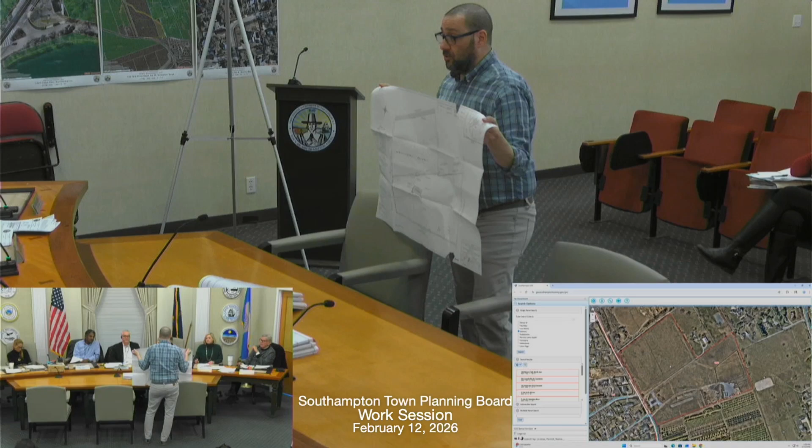So they're looking at what amounts to an agricultural building. It's 10,000 square feet, pretty big. This is a landscaping nursery, so the agricultural entity there is nursery stock.

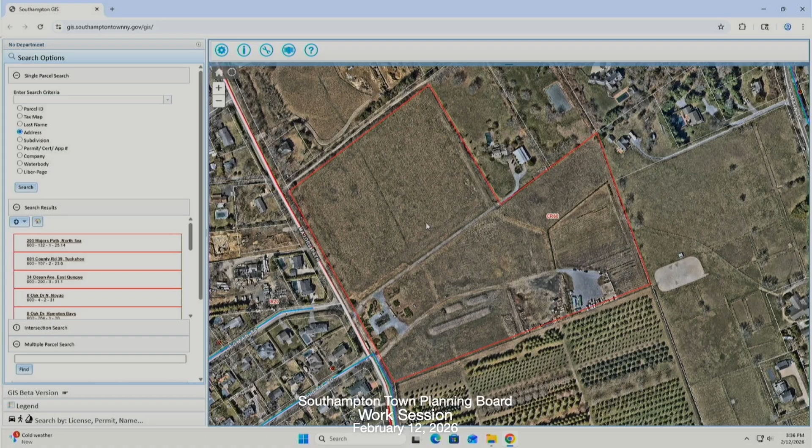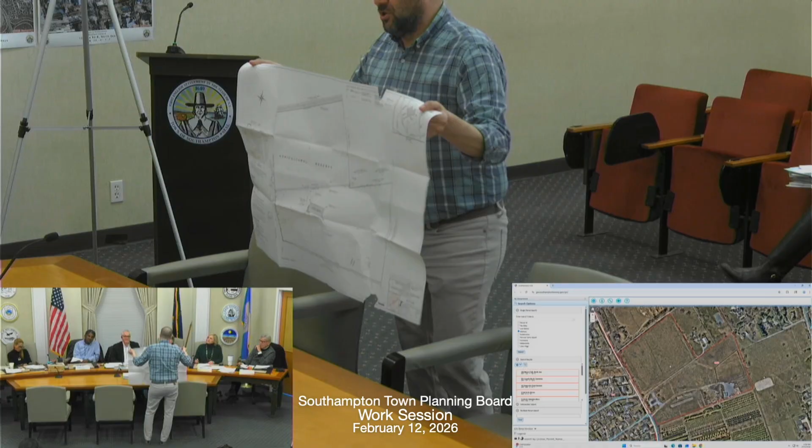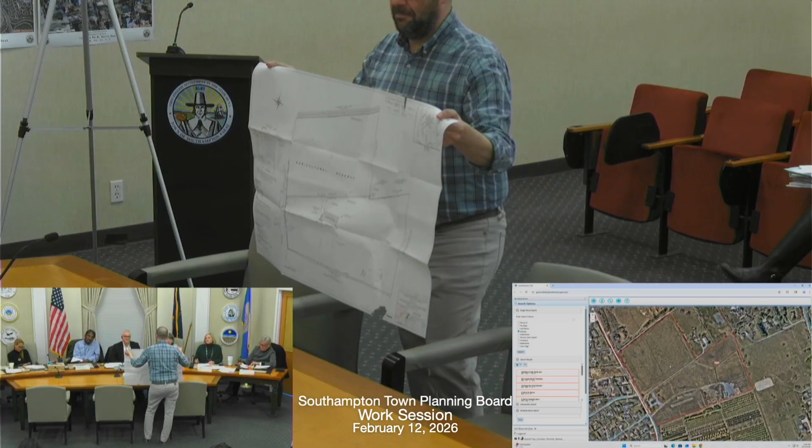I'm recommending the application be deemed incomplete. I spoke with the applicant. There was some mapping stuff, some architectural information we needed, and some description of how all this operates, the need for a 10,000 square foot building, some floor plans perhaps that showed the space. They may have actually given the floor plans. I also know this landscaper, he's a local police officer, and he has other property he operates his landscaping business out of. So I said all that information would be helpful so we can make sure we have a bona fide agricultural use here. So we're just going to deem it incomplete, and I've already met with them, so they'll get us the information ASAP.

Trina, how about North Sea Hardware? Yeah, that's another completeness, also incomplete. This is for an existing hardware store, they're looking to legalize a portion of storage, 640 square feet of these steel containers they've set in the back. They're looking to legalize that, so it's a site plan wetlands permit application. But I don't have a survey that's to scale. Very recently the Environment Division flagged the wetlands, so they still have to map that on their survey. And then we also need plans and elevations. So we really don't have much to review yet.

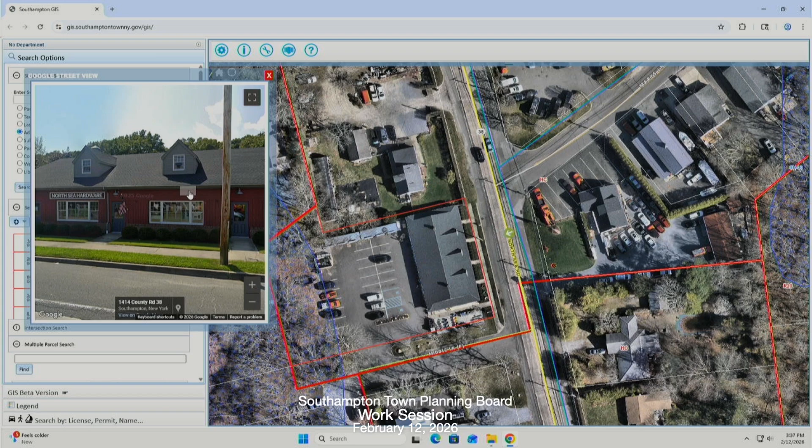And Seth is up, 449 Water Mill Towd Road. This is merely an extension of a revegetation approval. We received a request to have an extension until April 30th, 2026 for the site. I'll just remind you, it was the one with the underground basement basketball court. At any rate, they want to extend their revegetation, so April 30th, 2026.

They can't get a CO until -- no, they don't want to lose that approval. Do you want to give it to him till May 30th, since I'm not quite sure how much planting? Well, they start planting in March. Yeah, but the ground's frozen. If it ever stops freezing. They had asked, I'd certainly give them till May. Want to do May? Maybe, I don't know. It's a tough winter. That makes sense, we don't want to have to -- looks like the building permit was issued. Not tough for Joe Gaza. Right, so it links with the building permit being issued, May. Oh, was it, yeah, May? Oh yeah, you could link it with the building permit, it was May 12th, 2025.